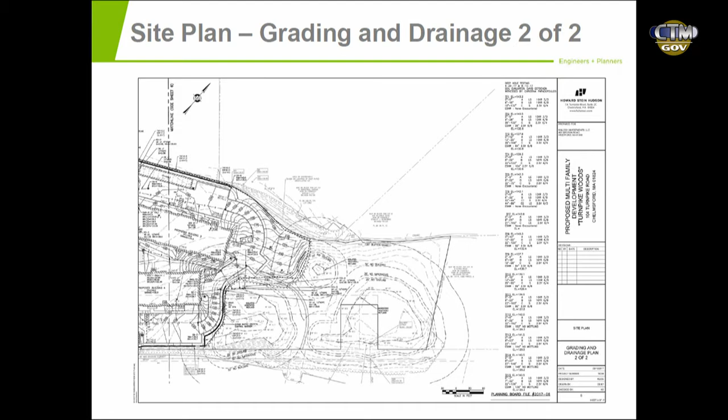At the last hearing, you had asked for a more detailed overview of drainage, so I wanted to give you a little bit of information tonight. I know it's hard to see. The copies before you are our presentation for this evening, and I've passed some out to the audience also. The site drainage plans have been broken up into 2 sheets for grading and drainage, basically the front half of the site and the rear half of the site.

Involved in every drainage design, we do a pre-development analysis and a post-development analysis. This is also part of our site plan package, and what it does is break up drainage areas that show where the water flows. In the existing site condition, there's a certain part of the property that flows off to the north, a certain part that flows off towards Turnpike Road, and then there's 4 internal areas that flow to low points within the subject site. That's what we use to compare in post-development.

So we're looking at design points outside of the property to make sure we're not increasing pre- to post-development flow. Our post-development subcatchment gets a lot more detailed because we're looking at drainage areas that go to different catch basins throughout the site and then through pipes to the storage areas we're proposing on site.

We did approximately 15 test pits on site. We were out there a couple of different days as the project evolved to make sure we got enough testing in the area where we wanted to put our drainage system. Essentially we were looking at making sure we weren't sending more flow to the abutter to the north, making sure we weren't sending more flow to the abutter on Turnpike Road, and also making sure it didn't leave the site or send more flow out to the bordering vegetated wetland at the rear of the subject site.

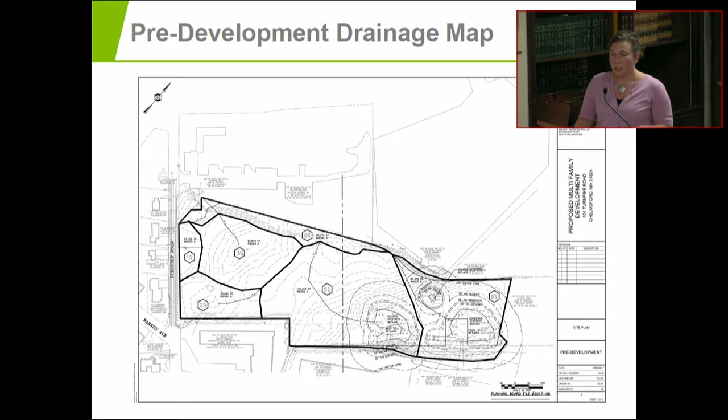But essentially what it serves is flood storage for waters coming off this site. So we looked at basically retaining everything within the site, because there's very little flow that goes off site now.

Our soil testing, contained on the grading, drainage, and utility plans along the left-hand side there, shows the majority of the site is sand, and it showed the water table throughout the site. That's the 15 test pits we did. All the test pits were witnessed by your town engineer, Christina Papadopoulos, who is here tonight, to make sure we were all looking at the same thing and had the same water table elevations and the same types of material in the ground.

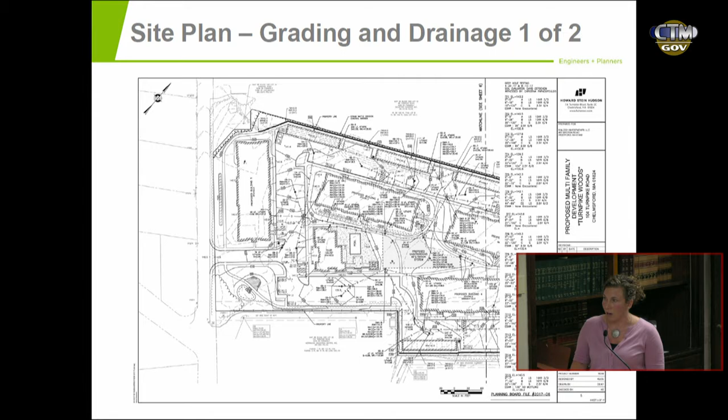Those elevations and the material we find specify where the drainage system needs to sit if we were to do infiltration or recharge within the ground. It also specifies how fast that water is able to leave the site, and all of those are contained within the drainage calculations.

So essentially our site is captured, all the paved areas are captured, the rooftop areas are captured, and some of the grassed areas are captured. They are put into deep sump-fitted catch basins, and then the majority of the site goes to an underground infiltration system, which is a StormTech system, a system of plastic arches. You see them a lot at construction sites around.

Essentially, it's an infiltration practice which allows you to capture a larger volume than a circular pipe, so you can get an additional volume in there. Those are also fitted with what's called an isolator row, a row of the system wrapped with geofabric that essentially completes the process of TSS removal, total suspended solids, which is 80%, required under the Massachusetts Stormwater Management Regulations.

So in the report, we go through the 10 steps of documenting compliance with that. Essentially, what we're looking to prove is that we meet the recharge requirement, that we meet the treatment requirement, and that we're not affecting or increasing our post-development flow over the pre-development flow. That's all contained within the stormwater report that you have.

Instead of breaking the system up into a lot of small systems under the paved area, it made sense to put it in a centralized location in the green area in the middle, so the system is contained in the green space between all of the buildings. The system's approximately 6 3/4 feet deep from top to bottom, and the arches are 5 feet in height.

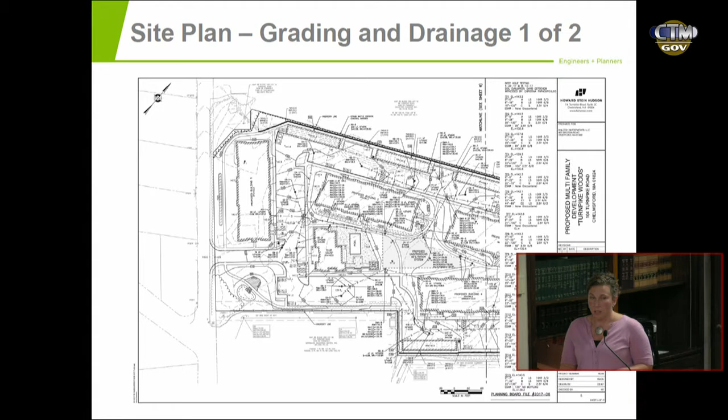The water is collected, goes through the treatment system, then into that system and is recharged into the ground. As the water builds up within it, there's a weir positioned at the end of the system, which allows the water to outlet at a high elevation out to the isolated wetland at the rear of the site, and that is what we control for pre to post development flow.

There are a couple of small areas down by the rear garages that, elevation-wise, won't make it into that centralized system. So what we did was capture those areas and put them through a Stormceptor, which is a proprietary treatment device to get the 80% TSS removal before allowing that also out to the isolated wetland at the rear of the site.

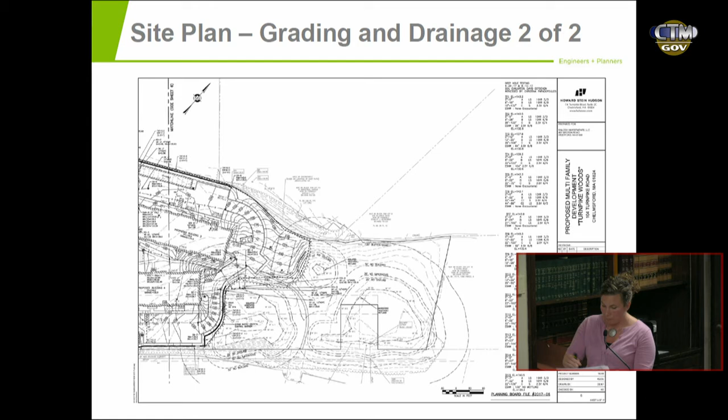I think that pretty much covers it from a high level. The maps show all of the different areas as we capture them and put them through the system. The pre to post development rates are contained within a chart.

We also looked at volumes to make sure that, especially in the 100-year storm event, we were reducing volumes off-site, for flooding purposes, to make sure we're not increasing flooding anywhere. Also contained within that report are our recharge requirements, showing that we not only meet the recharge requirement, but that the underground pond essentially drains within 72 hours.

Because that's what the regulation requires, that it drains within that period of time. It also shows you how each of these best management practices treats the stormwater and why we meet the 80% TSS removal for each of these treatment chains. That is the long and short of it. I know you wanted a little more detail.

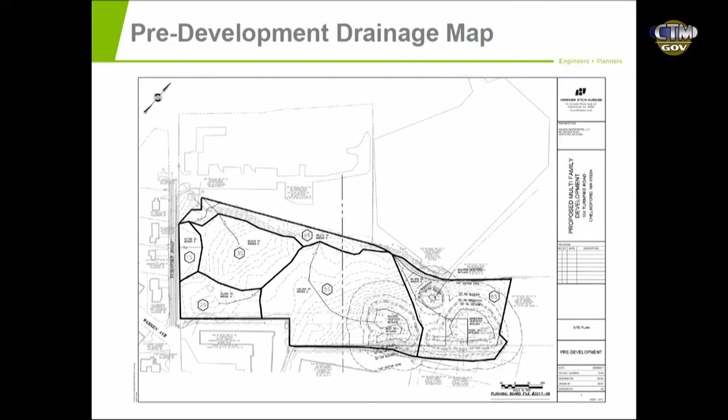Can you go back to the original map and point to the area where you have your infiltration area? It's hard to see with these small plans. Right, so it's entirely within this area here, contained in the common area, underground.

Is the system sufficient enough to handle a 100-year storm? Yes, and the 100-year storm is contained within the chart here.

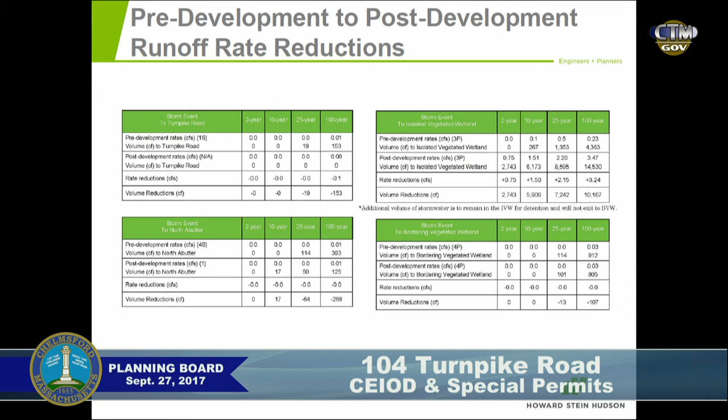So is there any thought of using pervious surface anywhere? No, there wasn't, not here, not for the pavement areas. What we've found is certainly, like in Mr. McCrensky's project on North Road, it works fantastic. It's a small site, it's self-contained, and it has a property manager that's very meticulous with cleaning the area. This is a larger site with a lot of pavement, which again will have a management company, but it requires vacuuming of the site, and it requires a significant amount of basically making sure that no materials are placed on that—salt, sand, other types of items. So we didn't think it was an appropriate place for that.

Okay, just quickly, Ann, do you have any questions on the drainage? Remember, it's going to go to Christina for a full review. No, I don't—I trust Christina's review on this. Henry? I do understand what you're doing.

Okay, I'm good. Henry, real quickly, what's your water table? How far down is it? Well, it depends where you are throughout the site, but it's roughly in the middle of our system—it's about 9 to 10 feet. Okay, so 9-10 feet of sand, plenty.

Christina's already issued a letter to this board regarding her review of the site, and I have some minor engineering changes that we're making that will be presented in a revised set of materials, which will take care of some of the housekeeping items there. So we'll circle back to the letter. Did we read it last week? Did we read your letter last week? Yep.

Okay, now I'd like to turn it over to Carrie Pike, who's one of our principals at Howard Stein Hudson, to discuss the traffic analysis that we did for the site. Traffic or architecture? Traffic. Okay.

Good evening, as Katie said, I'm Carrie Pike with Howard Stein Hudson to discuss the traffic briefly for you. So you have copies of the traffic impact and access study that we prepared. That report includes the prescribed elements, so we typically evaluate the existing conditions. We collected traffic count data, do observations, collect crash data, and then forecast the future conditions.

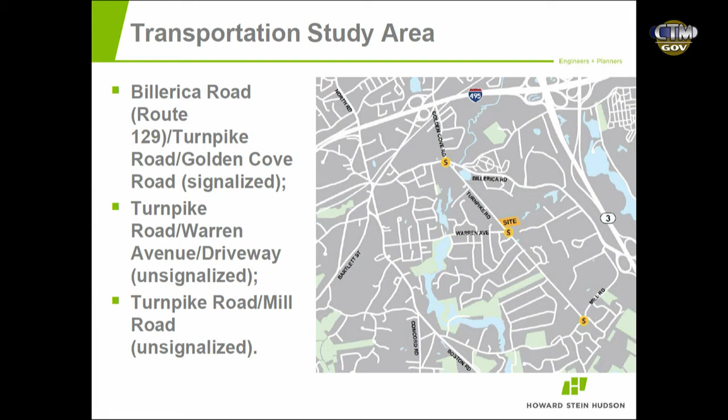So we did the traffic analysis for those 3 conditions—existing, no-build, and build—as part of the transportation study. As I said, we also looked at crash data. This shows you the crash data for those 3 intersections. We pulled the most recent 5 years, so 2010 to 2014 is the data available from Mass DOT. You can see the numbers of collisions, and then we also calculate a crash rate for the intersection, which is the number of crashes that occur per million entering vehicles—based on the number of crashes in addition to the volume of traffic going through the intersection. We compared that to MassDOT District 4's average, so they have two different numbers.

One number they calculate is based on signalized intersections, and the other is for locations with just stop signs. Billerica Road, Turnpike Road, and Golden Cove Road has a traffic signal, so that district average is 0.73. The crash rate we calculated is 0.24, well below the district average.

For Turnpike Road and Warren Avenue, that intersection is unsignalized. The crash rate for the district average is 0.56. We had no crashes at that location, so clearly below the district average.

Turnpike Road and Mill Road, in the existing condition, as I'm sure you folks are aware, is above the MassDOT District 4 average. That's the current condition, and primarily the reason is the sight distance there. If you've driven through the intersection, you have challenging geometry with vertical curves and things like that, which makes it challenging for people to see each other as they're moving through the intersection.

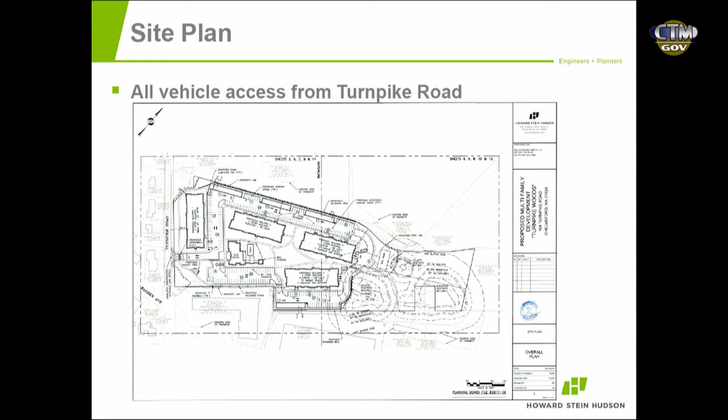So we also looked at site access. This is the site plan, as you can see here. Turnpike Road is on the left side. A few things I want to mention: all the vehicle access will be through Turnpike Road, the driveway is located there, and we did look at the sight distance for this.

To the left, as you look, you can see pretty much back to Kensington, well over the 320 feet required at 45 miles an hour. To the right, you have a bit of a dip in the road, about 350 feet when we measured. So you are over the required sight distance for a 45 mile an hour speed. We used the 85th percentile, meaning 85% of traffic is going at or below that speed, so some folks are potentially going a little faster. At 45, we still feel there's good sight distance for people to come out.

As we move through the site design, we've talked with Katie about ensuring you don't have plantings too close to the road on either side of the driveway, or anything that would block people's vision as they come or go.

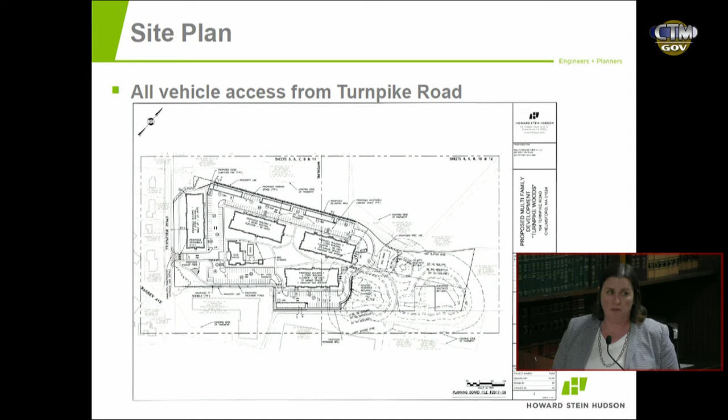Now I want to talk about the traffic generated by the development. We have 168 residential units and 325 parking spaces. In the morning rush hour on a weekday, based on that number of units, we're projecting 86 trips coming and going. More are exiting than entering, since folks are going to work or taking kids to school — 17 entering, 69 exiting. That's approximately 1 to 2 new cars per minute on Turnpike Road in that hour.

That's the worst case, and the two rush hours are kind of the worst case. In the afternoon peak hour, we're projecting 68 entering and 36 exiting, as more people come home from work. Again, that works out to about 1 to 2 new cars per minute on Turnpike Road in that hour. Over the rest of the day, the traffic is less than that.

What we do with those numbers is project them onto the local roadways, assigning them to where they might be going, to look at the three intersections. You can see the different percentages here, based on U.S. Census Journey to Work data. About 20% heading north on Golden Cove, 38% on Mill coming and going, 10% in on the east on Billerica Road, and roughly 16% on the west side heading towards Town Center.

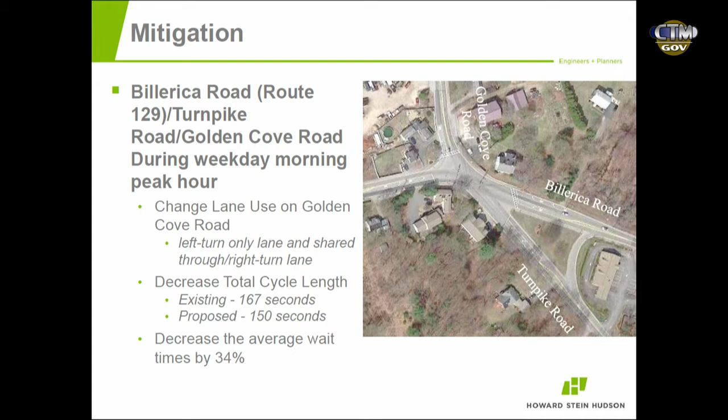So that's something that doesn't require a lot of construction, but we would be willing to participate in that process if that's something the town is interested in. We had also talked about, I think there was a mention earlier, of the LRTA potential route. That's something we don't necessarily feel we need for the project, but if it's something the town is interested in, we would be willing to participate with that as well.

I think now we're on to architecture. Stay there. Stay right there. Yep. Nan?

The volume distribution map answered my question. Oh, Henry? Lovely. Thank you.

Good. Mike? Okay, now I want to make sure that I've properly understood the traffic report. It sounds like you've got a daily traffic on there of about 3,300 cars. It sounds like you're adding about 1,000. That's about right, 1,100, something like that.

So while that's not an unmanageable increase, it's a distinct and notable increase. It's not insignificant noise. So I would encourage discussion of mitigation and what you've mentioned there at Golden Cove, seeing as I go through it every morning. That would be much appreciated. But there may be other mitigation that ought to be discussed as well.

Okay, Monica? On that point, in terms of looking at the existing conditions on page 14 and the proposed conditions after build at Golden Cove, your level of service is an F at Golden Cove to begin with. So you can't get much lower than that. So it looks like we definitely need to address the mitigation there as well.

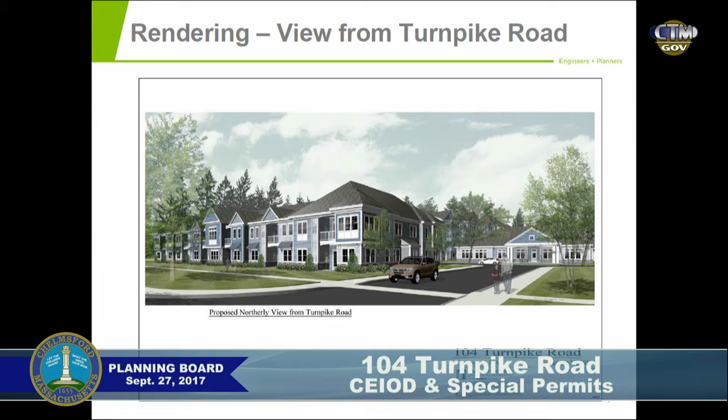He wasn't exactly on board with retiming those because he wants to see as much traffic or as many vehicles come through that Golden Cove, Billerica Road intersection. The retiming we had proposed would probably only alleviate slightly the Turnpike Road traffic, but with this new plan we'd definitely be looking to speak with him about that and see if it's something we could help make happen.

Well, I travel 129 every day. Me too. And in the morning, if that timing is shortened coming from the center out towards Route 3, that was his fear - it can really back up into the center. Right now it does, I've seen it as far as Summer Street.

That has to be a consideration with whatever you propose. I think these two things combined could help, but we will be talking to him about that and seeing what his reaction is.

I'd like you to include the four-way stop too at the other end. I think that's a simple one.

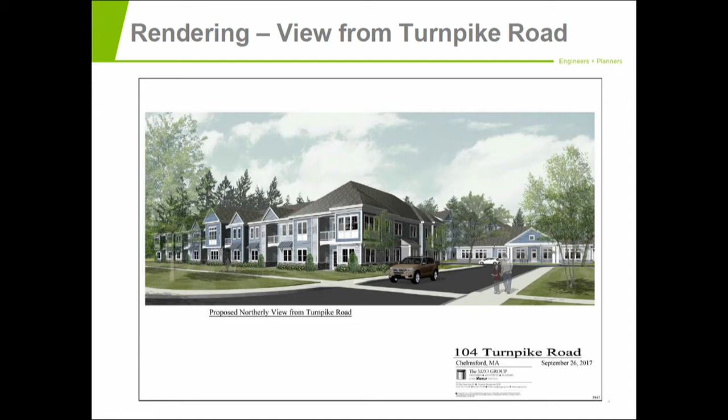So the first building that I call Building 1, if you look to the lower portion of the rendering here, you'll see that's the building that faces or fronts on Turnpike Road. A 2-story, 24-unit building. This building had, it's an interesting building. This one presents two fronts. You have to design this building essentially with two fronts. One is the front of the entire project that faces directly on the Turnpike, and the other is the front that the residents would see every time they come home from work.

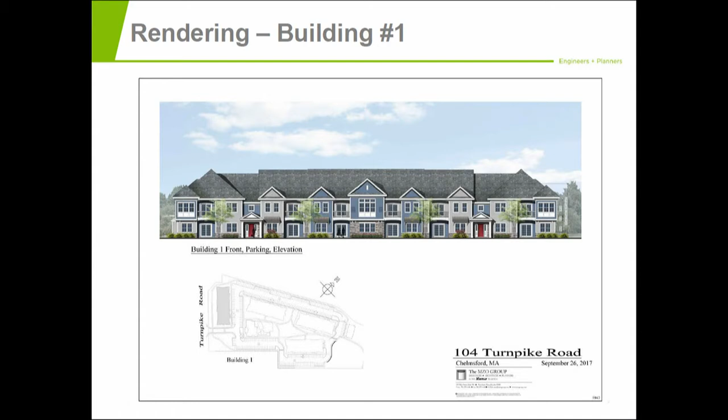So it's kind of an interesting architectural design along those lines. Again, the typical floor plan is 12 units per floor. This building is a 2-story walk-up, therefore there's no elevator. The main entrance points to the building are biased hard to the right and hard to the left. And all the units are connected by way of a central double-loaded corridor. Second floor is very similar to the first. There's some different wall undulations. If you look at the facade, the elevations closely, you'll see that some areas have garrison overhangs, some don't. We did try and employ some kind of undulation to these elevations so that it was not simply a straight 200-foot long box. I think we were fairly successful, but we'll let you decide.

I have a question. Shoot. So, go back to the one where you show your stairs. Yeah. You have them on either side.

Am I reading this right, when you say front elevation, the front elevation will be facing Turnpike? No, sorry, that was the interesting part about designing this building. Front elevations in all cases refer to the parking lot side, what residents would depict as the front, because those are the doors going in. If front was towards Turnpike, people would have to walk around the building to get in, which would be the first architecture mistake.

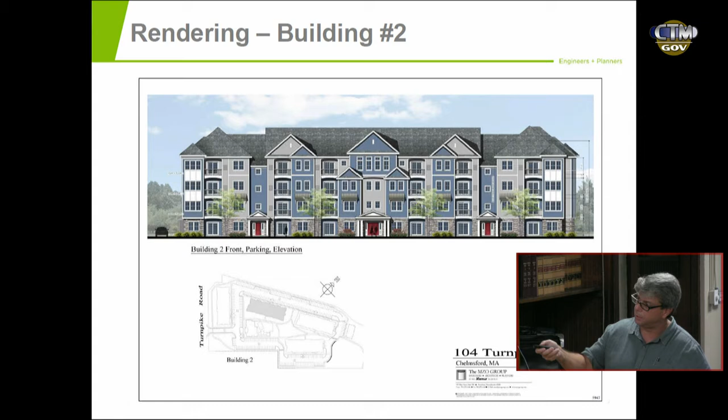That's the elevation you'll see from the parking lot, which is what I'll call the front elevation when we get there. Again, it's a typical 12-unit floor plan. This building, and all the other apartment buildings, are elevator-access type buildings. We'll have the two entrances on either side like we had in the first building, but we're also incorporating a nice welcoming front main entrance to the building.

On the parking lot side we're setting up, again, somewhat of a bilaterally symmetrical organization for the building. You go in, and if you look closely at the floor plan, there's an entry vestibule, an airlock. Just beyond that will be the machine room and other component parts required for the elevator. You can enter the elevator right there and access all floors, or you can go, like we did on the 24-unit building, into either staircase at the end of the building and up and down.

One other thing we're incorporating in this building is a pass-through to the courtyard. So if you come home and there's a function happening at the clubhouse, you can just go right through the middle of the building, out the other side, and on your way right over to the clubhouse.

The second floor, I believe the second and third floors, have a very similar floor plan, with the exception of the space over the entry corridor on the first floor. If you look, right in the middle of the building there's a recess. Again, we're trying to further emphasize the undulations of the building, working in concert with the separate gables we're placing all over the front of the building.

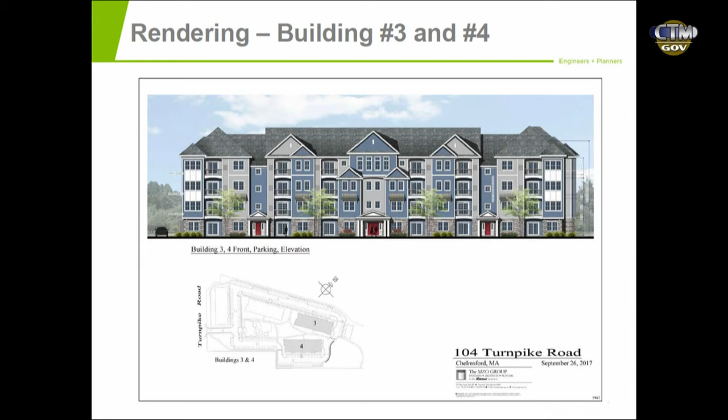The front elevations are almost identical to building 2, with the exception of the garage end. Buildings 3 and 4 are the eastmost buildings, and the garage entrances are on the easterly end of both buildings, so there'll be 2 mirrored buildings. The garage entrances on both buildings are well off to the east, closest to the dog park area.

These buildings both have a parking garage in the basement. There's 38 parking spaces. The requisite handicap van space is the first one we plan. We've also included another sort of regular parking space, and then all the rest are standard size, full-size parking spaces.

The elevator access is in the middle of the garage there. We are planning to have some mechanical space down towards the garage end for sprinklers or anything else we might need once we get into actual documentation of the building, to find out whether we need pumps or anything else to feed the building.

Just, you said 38 spaces, I see 37. Is there one missing? No, I'm sorry, I just can't read it. Whatever, 37. I didn't have that one.

And were you supposed to have bike storage down here? No, we'll get that. There is a space, although we do have bike storage accounted for at the clubhouse. Although if you look closely enough, there's a lot of room around the periphery of the parking spaces where bike storage could be fit, especially at the far end of the building. There's a lot of space down there.

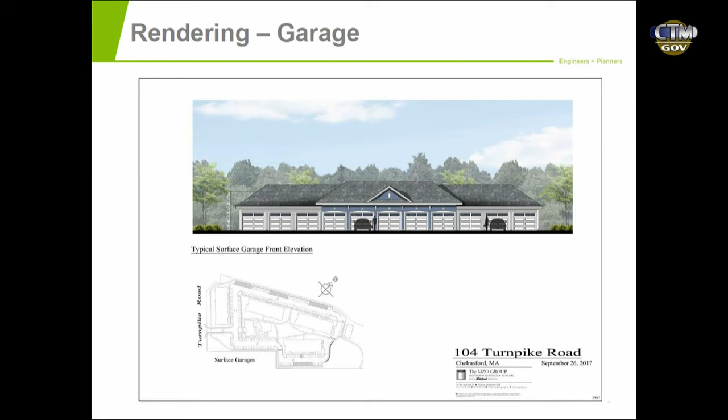We articulated the middle of the building by raising the roof a little bit, changing the siding under the raised roof, and adding a middle gable. It's our intent that the middle parking spaces would be further articulated by some RLM or straight arm lighting, whereas the flanking 3 units on either end will probably have just some very low wattage soffit lighting for safety purposes. I think the length and width there is about 120 feet long, 22 feet deep.

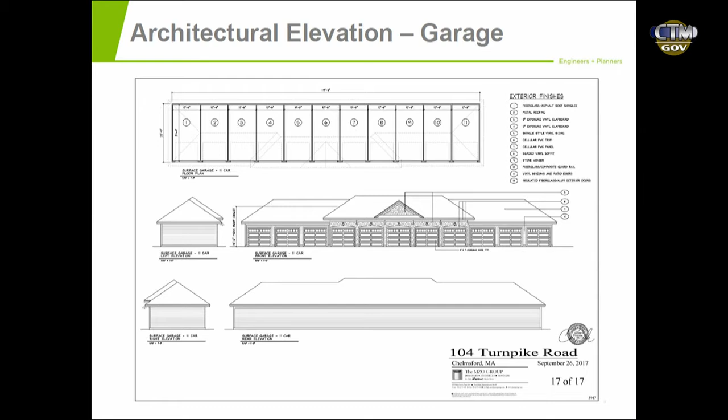And we use the same siding materials and roofing techniques that we have throughout the project.

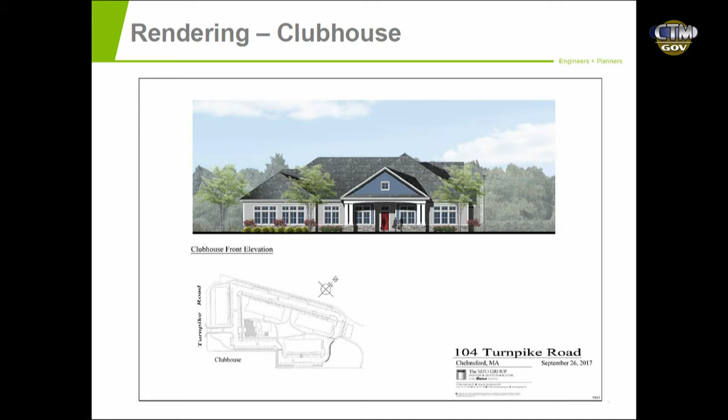Lastly, the clubhouse, the amenity clubhouse. That will be basically your welcoming view when you turn up the entryway to the site. The main front door is there in red, with a giant portico to receive visitors and people who want to come check out the project. Support space that includes leasing.

There's also a huge package room. One of the things we're finding in all our multifamily developments is that a huge package room is necessary. Now that everybody buys everything online, you have to have a huge room with package lockers where all your tenants or residents can come in, check in without there being a staffed office, and retrieve their parcels. Without that, you're just asking the office staff to do a ton of it.

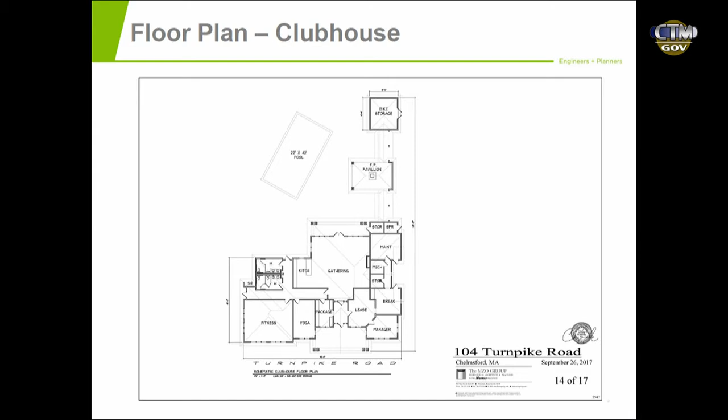Between the bike storage, along past the fireplace pavilion up to the clubhouse proper, it's our intent to have a three-quarter wall, which you'll see in the elevations here, that will act as a screen from the parking. Yet the top three or four feet will be open to allow sounds and smells and everything else happening in the pool area when people are having gatherings out there. And people pulling up to visit the leasing offices will be able to hear and smell and see what's going on.

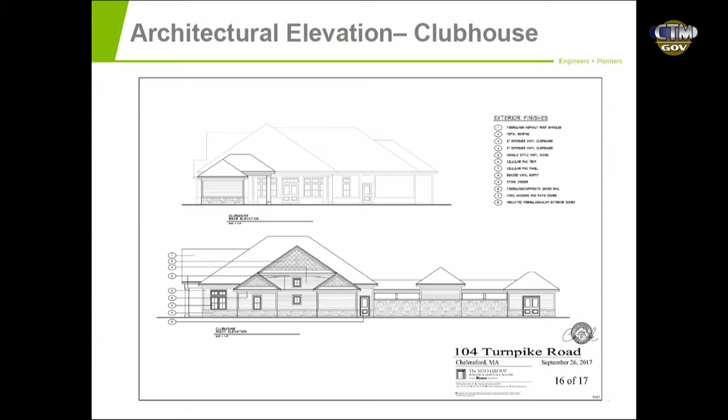The building 1 on Turnpike, I noticed you were talking about the front elevation, and the front elevation pictured was from the parking lot rather than from Turnpike. So where's your main entrance that opens up to Turnpike to make it a welcoming, inclusive environment where people leave the new sidewalk from Turnpike and then go directly into the building?

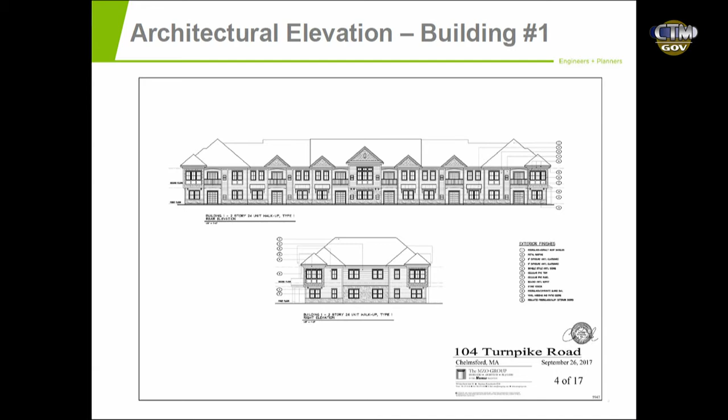Well, that is the front, you can tell by the two main entrances, left and right, and that's the back. The back does not have a main entrance into the guts of the building, the back is all residents' homes on the ground floor. So there isn't a cut through or a main entrance into the corridor from that side of it. So essentially, you're on a main street, you're part of a neighborhood, but yet the back is all you see.

You don't have a welcoming entrance, you have to go all the way around? Yes. That doesn't work. If you want to be part of the neighborhood, have a front door. If you have a new sidewalk where you want people to walk up and down and feel like it's part of it, there should be a front door.

Understood, and I agree. That's one of the most challenging aspects of that building area. You have about, I think, maybe 60 feet, or 50 feet, from the street to the building. And across which there is a ton of landscaping, part of that to provide a little screen from the street, traffic, noise, and everything else.

And there are six residents on that side of the building on the ground floor that have their back doors there. It's difficult, it's one of those things that's hard to address.

Actually, to that end, one of the things I was asking when I looked at the landscaping plan is, where's the fence? As a development, I was thinking there might be, as cars are zooming by, and I know exactly what that is, I live 5 feet from the street over in Westford. I appreciated the amount of landscaping done between the street and the building, especially if I'm one of those residents wanting to come out on that patio and hang out there.

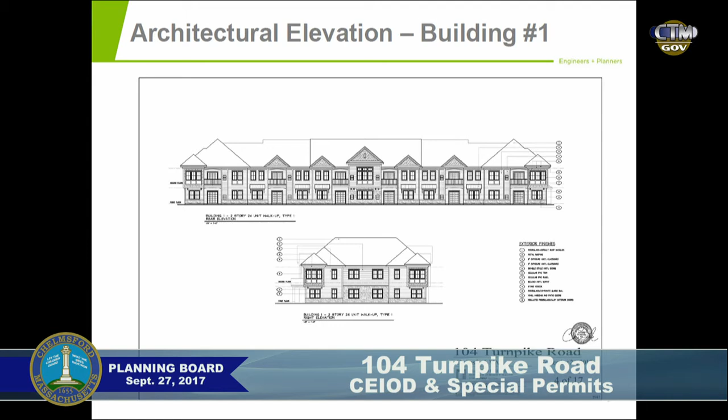Wait, is that building 2 or this building? It's building 1, on Turnpike, not building 2 - the front-facing building that everyone sees. That's the building we have up here. This building has a hallway at either end; it doesn't have the central access of the fourth story like you were saying. But is there any way we could bring this hallway through to the other side and have an additional front door on Turnpike Road? That is something we could look at.

Hold on, I want to discuss her point because I disagree. Six apartments would go out onto Turnpike. By doing what they're doing, they're forcing everybody into the center of the property instead of having 24 apartments go out onto Turnpike. For me it's a safety factor - you're only allowing 6 apartments out there. Whether you make those sliding doors look like front doors on a couple units, that's fine with me, but I'd rather have 6 going toward Turnpike and 18 going more toward the center of the property, especially if there are children who may need to walk around to the sidewalk or loop out to the front. For me, I disagree with your point. We can disagree, however - it's a convenience issue and an aesthetics issue.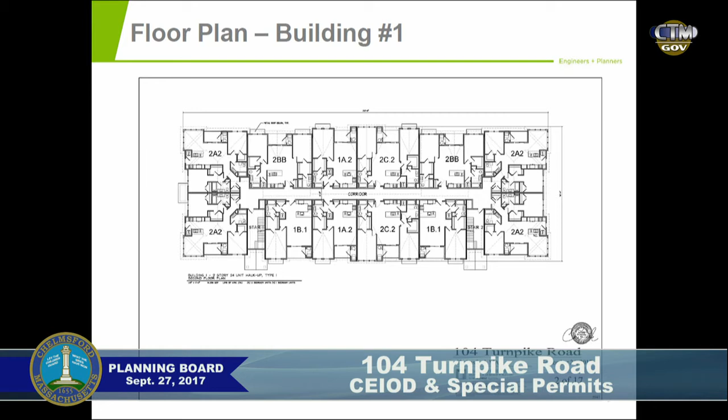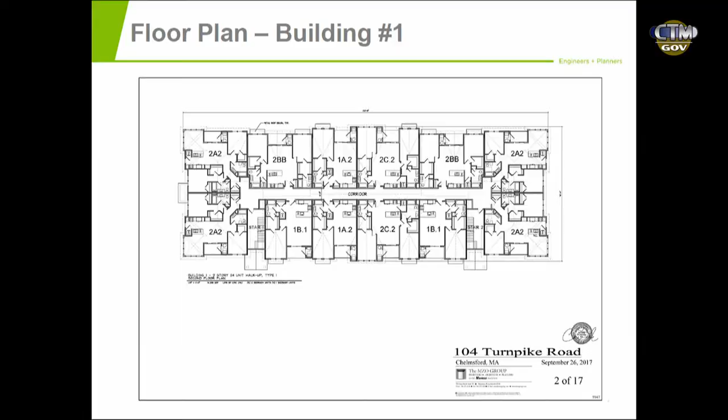Concern, and I know people have to live, but I think this looks like a real nice front from your plans, and we're gonna have lots of landscaping. But I think somehow in the rules and regulations you develop for this project, if it goes through, you're gonna have to make sure that area doesn't get jammed up with people's bikes, picnic tables and grills out on the lawn. Because on the first floor, there's gonna be an awful temptation, just speaking for myself. I might wanna park a bike back there, or if I had kids, leave their toys outside, and that'd change the whole character along the road, so that's just a comment.

That's one comment I have on that, and I'll hold everything else, George.

Mike? You don't suppose you have a picture with the full view from Turnpike with the full landscaping, fully rendered? I do not. I'm just kind of curious to see what that would look like, because it's an interesting discussion we're having here, outward facing or inward facing, and the nature of that landscaping kind of makes a difference there.

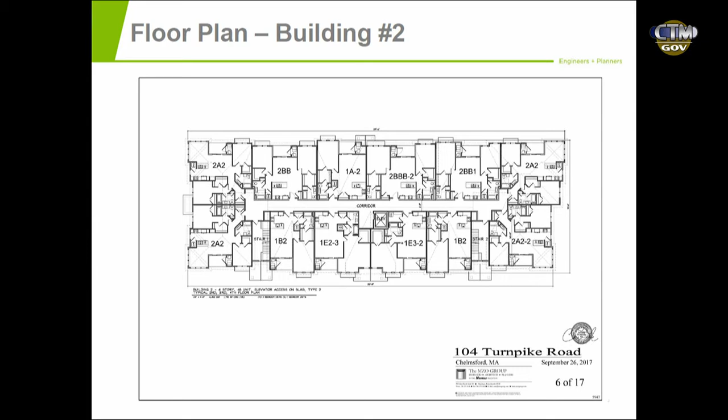I agree with you, George. I know people like to have their own private space, but it's gonna be tough being on Turnpike Road. I know in another development here in town, they've had to go around and basically said no grills on any of the decks, and the fire department went in and did a pickup. So for that issue, they are cracking down on it. You're not allowed to do that the way you used to, and they'd have to regulate themselves.

You're gonna have to have some sort of lighting, and I know every single one of those decks has to have a light fixture of some sort. We're be looking for something that doesn't do a lot of light pollution, especially right on the main road. I did ask the question last time, somewhere around here, we're gonna have air conditioning units. I know on Chelmsford, I'm not gonna say the name of the development, but on 110, as you drive by, all you see is air conditioners sitting right on the main road.

Yeah, if I could, we have taken that into account so far, which is one of the nice things about pitched roof buildings. Either you got to put those condensing units on the ground, and it just clutters up the place, and forget about kids leaving their toys out there. You got those things all over the place.

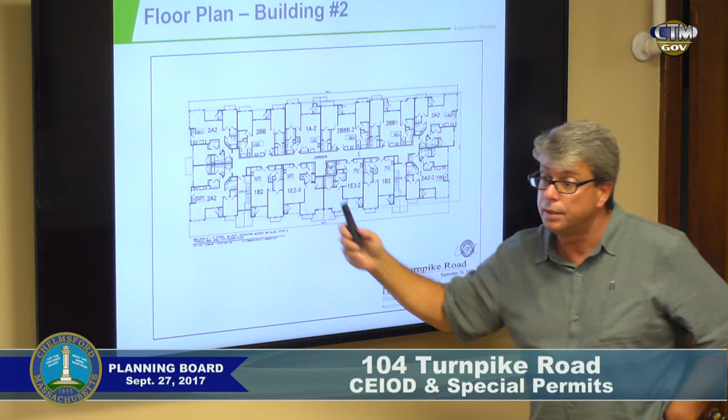These units, we intend to have through-wall units, so all the heating and cooling is self-contained in a closet right off the deck. So if we look closely at the buildings, these grills represent the air exchange required for the condensing units. Those can be bought to match the building, painted to match, so they fade as much as possible. That's what we think. It's an improvement — nice solution. Now that you pointed it out, I do see it. And it's nice to have it all in one space. I've worked in buildings where you gotta walk a mile to find wherever they put it.

It's a trade-off with these kinds of buildings, between people wanting to put those on the ground. Sometimes those condensing units will be a little more durable, long-lasting, but the runs for the refrigerant lines are forever. They're all gonna be heat pumps? Not necessarily. I mean, I'm not against them, I'm just curious. That's it for me for right now.

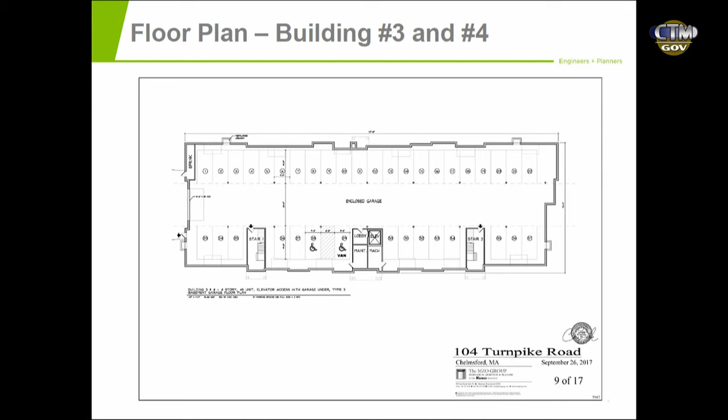All right, any other questions about the architecture? I just have one comment. If you go to the parking underneath, which would be slide 9 of 17, you see in the upper right-hand corner there's a space right up there. Might be a good spot for a bike rack. I know people with nice bikes will go lock them up someplace else. The kids that might be there will just stick them in a bike rack somewhere and scratch the cars. Yeah, okay.

The applicant, any other questions or comments you want to make at this point? At this point it's open to the public. It's a public hearing, so I'm opening it to the public. They can come to the podium, state their name and address for the record, and go to town.

Good evening, Bill Cassidy, 83 Turnpike Road. Public safety is a top concern here for everybody, there's no disagreement there. Currently, the way traffic is on Turnpike, I can't walk my dogs or collect my mail from the mailbox without fear of being hit by traffic. What I would suggest to the planning board is signage if this project moves forward, such as no parking/tow-away zone signs for Turnpike and Warren, and the installation of three-way stop signs at the intersections of Turnpike and Warren, in addition to Turnpike and Mill Road, which has had many near misses.

The other issue is 168 units. What I didn't see in any traffic report mentioned how many tons of trash is going to be generated each day coming out of the unit.